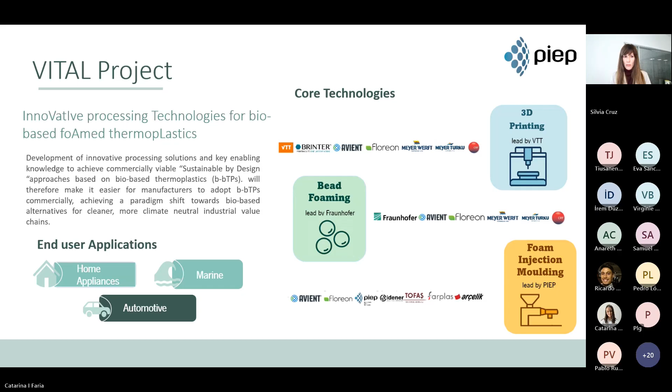To start our program, Johanna Lahti will set the foundations by exploring the world of bio-based thermoplastics. Dr. Lahti holds a Master of Science and a Doctor of Science in Technology in Paper Converting and Packaging Technology. She has worked for over 20 years as a scientist and lecturer at Tampere University of Technology in Finland. Currently, she is a senior scientist at VTT Technical Research Center of Finland, where she has been for more than 3 years focusing on sustainable materials and products. Her research interests include the processing of thermoplastic polymers, extrusion, coating, film casting, and the development of packaging materials. Dr. Lahti has participated in numerous national and international research projects and has authored over 60 scientific publications.

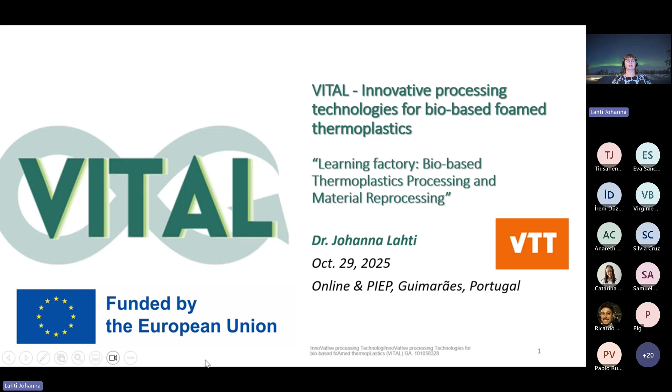First, I have some slides about the Vital project. Silvia already introduced the main areas of our project and some words about our targets, but these are the details of our Vital project. We have been ongoing now almost 41 months, so we are finishing the project next month. You can see all the partners also on this slide.

We have partners from Finland, Germany, UK, Italy, Spain, Portugal, Turkey, and so on - a lot of different partners representing the whole value chain which Vital is about: material producers, processing partners, and then especially the end users who are exploiting the developments of the Vital project. VTT has been the coordinator of this project.

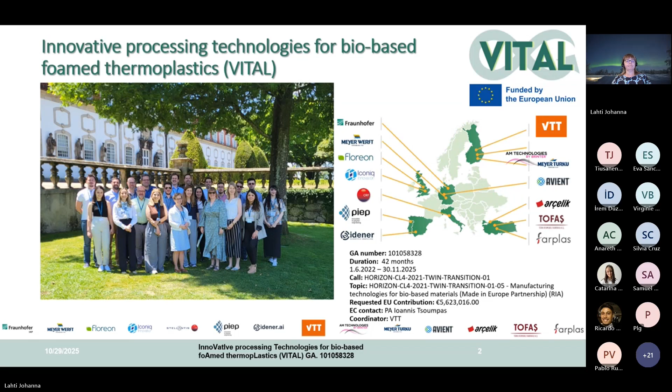The main target of the Vital project is relating to the transition from fossil-based materials to bio-based and recyclable materials. As we all know now, this is not an optional thing anymore - it is a strategic necessity. It is an important thing in the development of new materials and how they are processed and what kind of end products we are developing.

In the Vital project, we are focusing especially on creating solutions that are lightweight, durable, but also recyclable, especially foamed materials, and also adding bio-based materials. So a lot of different targets in the Vital project. Of course, we have different end uses, as Silvia mentioned, three different sectors here, and different sectors have different requirements. So this is a very challenging project to reach all these targets with these new materials and processes.

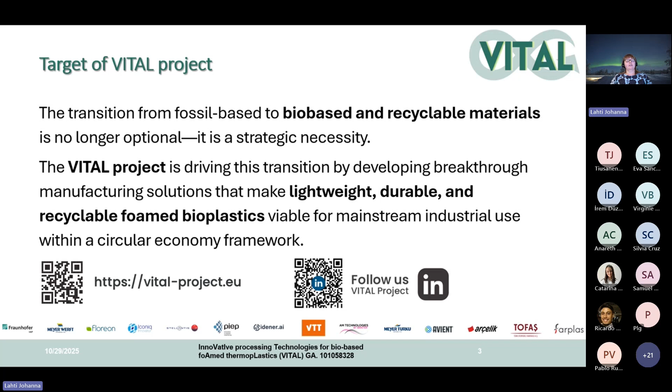In processing, we have three different processes that Silvia already mentioned: foam injection molding, 3D foam printing, and bead foaming. We have different partners responsible for or coordinating these different processes. Recycling of the developed materials is also very important.

Now I am moving from the introduction of Vital to the introduction of this learning factory. I will give a very short introduction to bio-based thermoplastics, and then also different foaming methods that are used.

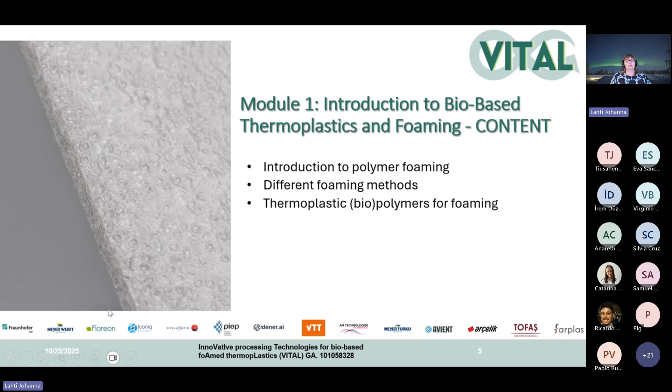So how or why to use thermoplastic foaming in general? Here are collected some positive things we can achieve with foaming. For example, with foaming we can improve impact resistance, increase ductility, and increase fatigue resistance. Materials are very workable and can have very good thermal and acoustic properties. These are properties that we can exploit in many different sectors.

For example, those that we are studying in the Vital project, but also outside that, for example the packaging area. Foaming also reduces material need. We can reduce processing temperatures needed compared to extrusion, coating, or casting - we typically use lower temperatures. We can reduce energy usage. Product weight is very important, so we can create lightweight structures, and we can reduce costs through these different improvements.

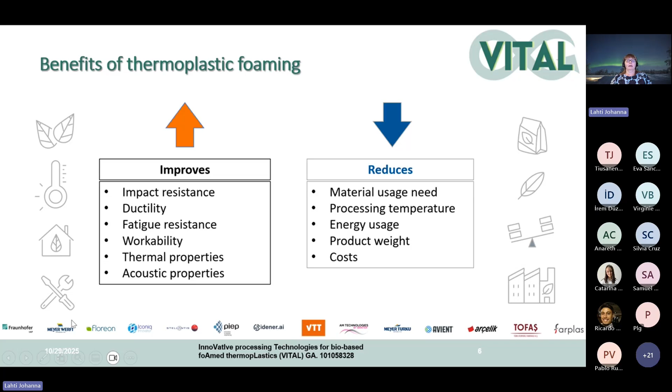About the foams themselves, we can have different types of foams produced through different processes. For example, we can have foams with different densities - from very low densities up to very high densities and everything in between. This we can then use for different end uses, where we need different densities to exploit the properties of these different types of materials.

The cell size can also be different, so we can have so-called nanocellular foams, something in between, and then these conventional cell sizes which are over 300 microns. This is also what makes foaming such a good method or process - we can create really different types of materials and structures.

We can also categorize the foams into closed cell structures and open cell structures, and these also have differences. For example, closed cell structures are typically more dense and stiffer, which is why they are better for thermal insulation. They have good moisture and heat resistance, and good shock absorption properties, so they can be used to pack very fragile objects in transportation.

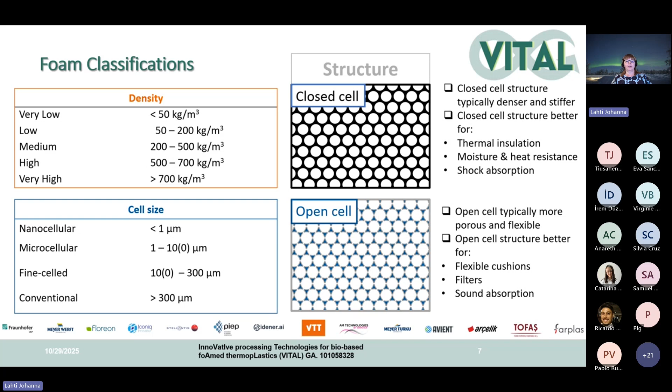About these thermoplastic foaming processes, we can categorize them into three different groups. First, we have extrusion foaming, which is typically used to produce sheet, board, or profile shaped products. This is a special extrusion system, requiring, for example, a melt cooler for low density products. I will show you some examples in the following slides about this process. This is a continuous production process.

Then we have bead or particle foaming, and this is a process where we create 3D shaped objects from fused beads. For the bead manufacturing, we have different kinds of processes available, like suspension polymerization or extrusion. And then also for the bead forming or foaming, we have different processes.

Typically, we use steam in this foaming process. And then the third process is foam injection molding, which is now the topic of this learning factory today, and you will hear and learn more about that today.

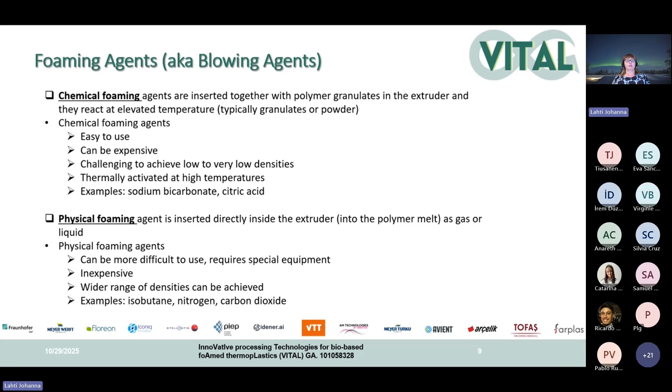Physical foaming agent is typically inserted directly inside the extruder into the polymer melt as a gas or as a liquid. These physical foaming agents can sometimes be a little bit difficult to use. They require special equipment, for example, if we are using gases. But as mentioned, they are cheaper to use than chemical foaming agents, and with these physical agents, we can achieve a wider range of densities compared to chemical foaming. Some examples, once again, are isobutane, nitrogen, or carbon dioxide.

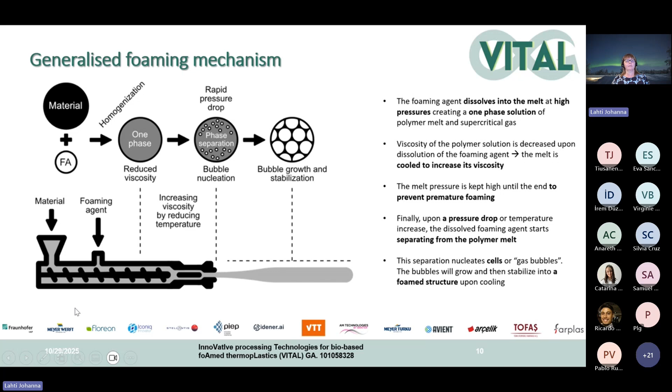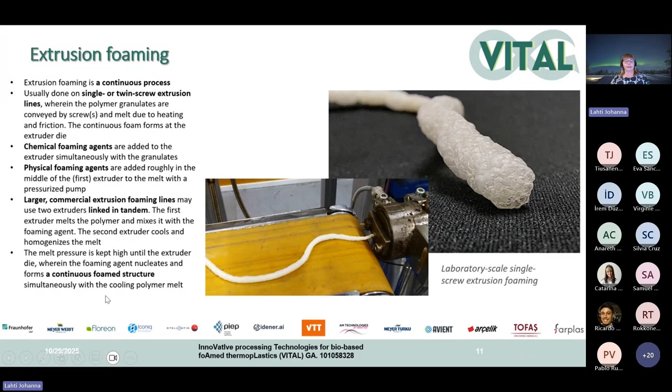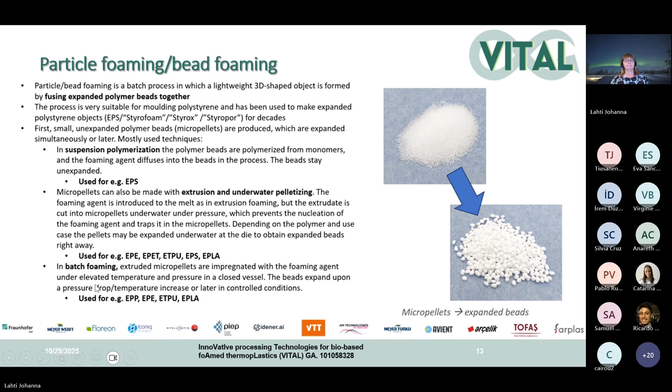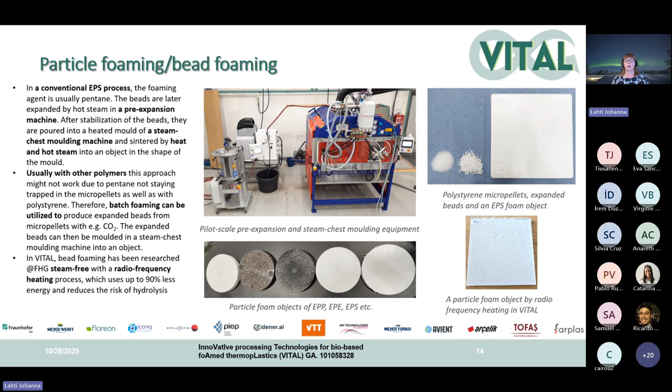Then I have the final slides about the actual polymers. Not sure if I've already gone over time, but I will run these through.

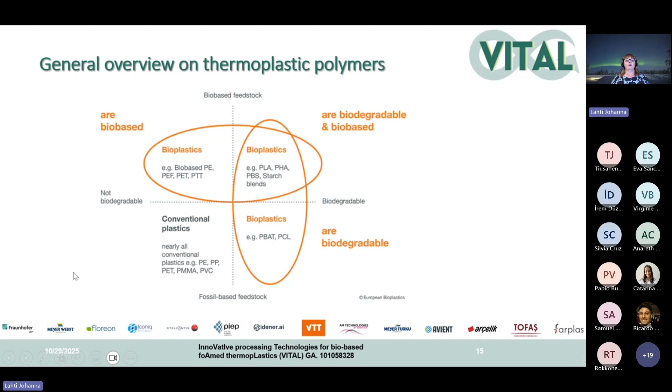This is a picture you may have seen many times representing the different categories for thermoplastic polymers. In the left lower corner, we see the conventional plastics, and then in these other three sectors, we see the different bioplastics. On the left-hand side, we have those that are not biodegradable, and on the right-hand side, we see the categories of biodegradable polymers. The right top corner represents biodegradable and bio-based polymers. You see some examples of polymers from these different categories.

And of course, we can use different biopolymers also in foaming processes, and these have also been studied in the Vital project. When we are shifting from fossil-based materials to bio-based, these bio-based and biodegradable polymers are more and more studied in foaming.

There are some challenges with melt strength sometimes in foaming, and this can be affected, for example, by blending with other polymers or by using chain extenders. In the Vital project, we have studied PLA blend from Floreon in different foaming processes used in this project - 3D foam printing, bead foaming, and foam injection molding. Maybe you will hear more about that later.

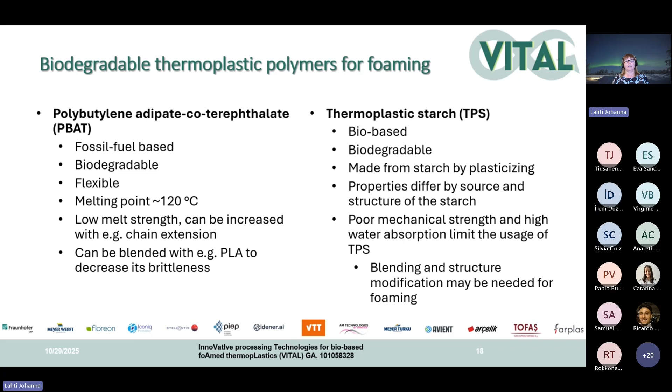Then the last polymer on my list is thermoplastic starch, TPS, which is bio-based and biodegradable. The properties of starch vary quite a lot depending on the source and structure of the starch. Once again, in foaming, mechanical strength can have some challenges, or high water absorption property, so blending or some structure modification is often needed to use it in foaming.

So with this, I thank you for your attention, and I wish you a nice day learning about foam injection molding. Thank you.

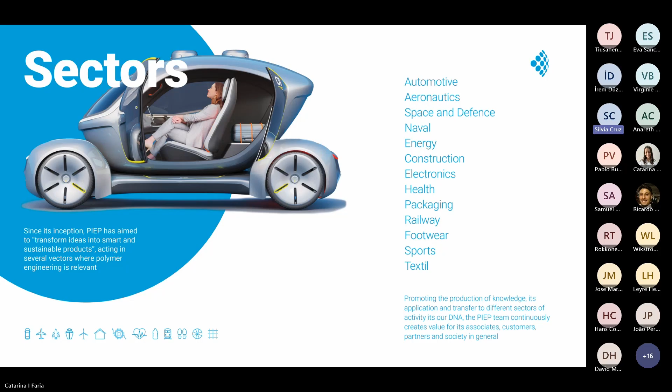We have developed projects in the most varied sectors in partnership with different partners and customers. We work on various issues such as climate transition, development of advanced materials, processing technologies, and sustainable solutions, all to strengthen the competitiveness of the plastics and manufacturing sector.

In this session, I will present the explanation and basic fundamentals of foam injection molding, how it works, and go through the benefits of this technology. Then I will connect it with the Vital project goals, and next cover bio-based key processing parameters and how PIEP is optimizing conditions to ensure consistent foam quality. I'll finish with a look ahead at future perspectives.

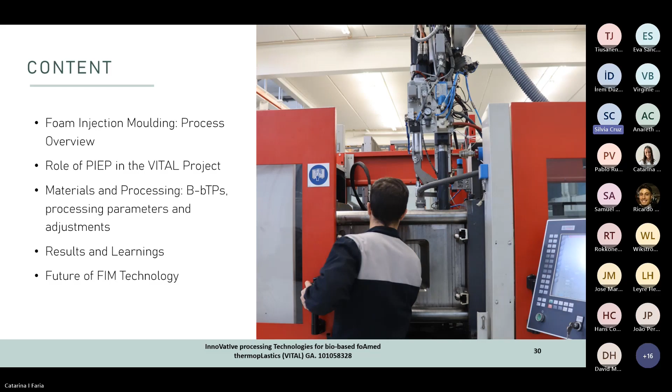So, what's foam injection molding? It's the injection molding process where a gas phase is deliberately introduced into the molten polymer during the process to create microcell structures, foams inside the part.

And how does this work? The foaming agent used in the process could be either physical or chemical. In the case of physical, it could be nitrogen or carbon dioxide. In case of chemical foaming agents, they could be inorganic or organic, such as calcium carbonate or talc.

So the physical foaming agent variation, this is accomplished by injecting the gas in its supercritical fluid phase through a dedicated supercritical fluid injector. In this phase, the gas is in a liquid-like state, obtained by maintaining the foam agent above a critical pressure and temperature, allowing the gas to quickly diffuse into the polymer melt, creating a single phase inside the barrel.

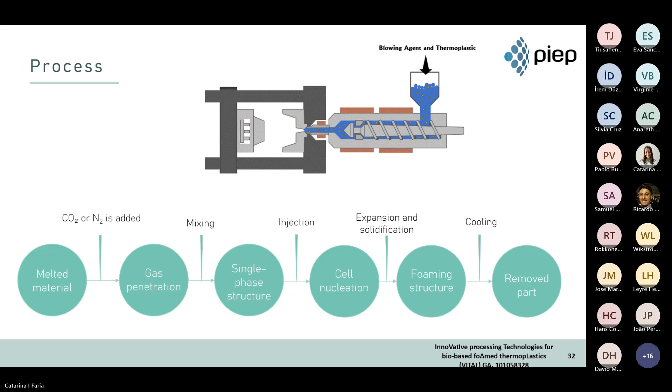In the physical foaming technology, a specific screw is required to ensure proper mixing. The screw is composed of an end region that possesses characteristic geometry to promote dynamic mixing, assuring the creation of a one-phase solution. As such, modifications are made to the end of the screw section or to the nozzle section by attaching a mixer. Due to this, the screw is longer than commonly used in conventional injection molding.

The chemical variant does not require modifications to the injection unit, needing only a shut-off nozzle. The foaming mechanism is promoted by the reaction of the chemical foaming agent in the polymer melt due to the high temperature, as already mentioned.

Some chemical foaming agents are exothermic, which can promote early foaming, reducing the residence time for the material, and consequently the cell structure is not uniform in most cases.

Also, the chemical foaming agent reaction may result in byproducts such as water, which can lead to additional degradation of the polymer matrix and reduction of mechanical properties. Also, the subproduct can damage the mold cavity, and the mold cavity and screw can suffer from this reaction and be damaged prematurely, which can influence their durability.

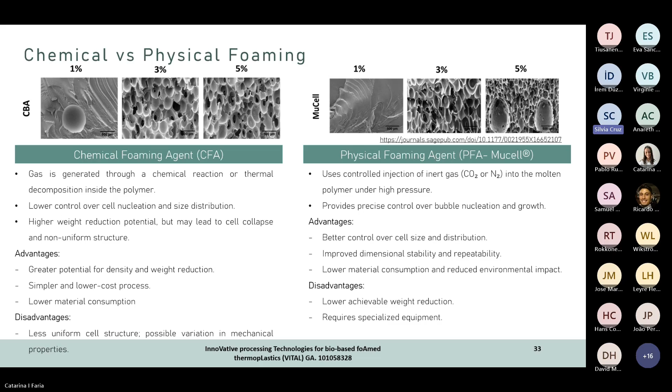So why use foam injection molding? The advantages of this technology compared to conventional injection molding are, to start, cycle time reduction. It could be reduced between 15 to 40%. Why? Because packing and holding phase is replaced by the nucleation phase, and cooling is also faster due to lower melt density and lower thermal conductivity.

Another advantage is lightweighting, reducing part weight typically between 10 to 30% due to the cellular structure. This will lead to lower material use, reduction in costs, and material saving. Also, this technology allows reduction of sink marks and warpage due to the gas expansion that compensates for shrinkage and improves dimensional stability.

Energy efficiency: lower material use and shorter cycles will reduce energy consumption. This also allows for more design flexibility, promoting the ability to mold thicker sections without defects. And lastly, it can also be used for thermal and acoustic insulation parts due to the foam structure.

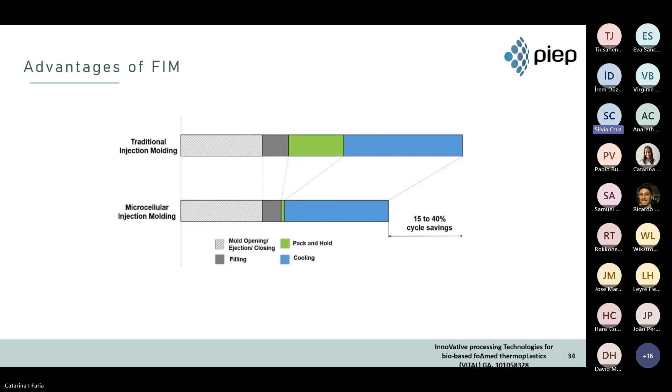Within the VITAL project, PIEP played an important role in the development of the foam injection mold line, one of the three key technology routes being explored. Our team has been working on process optimization, material characterization, and the integration of recycled and bio-based material into the foam injection mold process.

Through experimental trials, digital modeling, and collaboration with partners such as Edener, Arcelik, Tofas, and Farplas, PIEP contributed to the adaptation of the foam injection molding technology, processing bio-based formulations, process optimization, and demonstrating the feasibility of using bio-based materials at pilot scale. It validated material-process interactions under industrial conditions, evaluated mechanical and visual performance of the foam bio-based parts, and defined the key parameters enabling industrial implementation of foam injection molding.

We also helped industrial partners select the most promising formulations between several PLA formulations that were developed during the project by our partner Floreon, through physical, mechanical, thermal, and optical testing for material requirements validation. After the selection of the most suitable formulation of PLA...

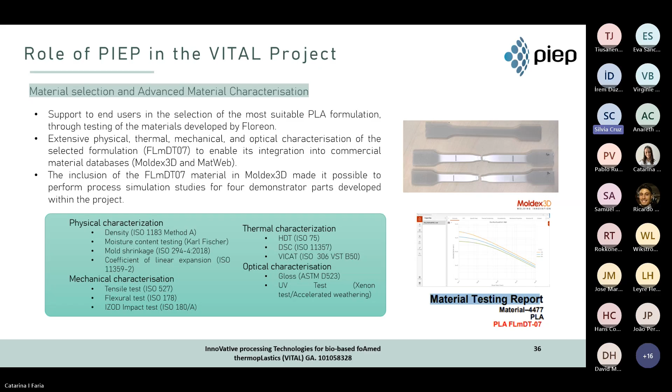We analyzed several parameters such as cell distribution, temperature profiles, material behavior during filling, and also the solubility of the gas in the polymer matrix. In the experimental results, we observed some variability in density between samples and small temperature variations requiring some adjustments. In the simulation, we obtained a more uniform and controlled density, more defined thermal gradients, and a good estimate of the material behavior during filling.

In short, the simulation accurately represented the real behavior of the process, although some small differences were obtained, highlighting the need for continuously validating the model with real data and the fact that there is some variability in bio-based materials. So after these results, this gave us the confidence to conduct some numerical modeling support.

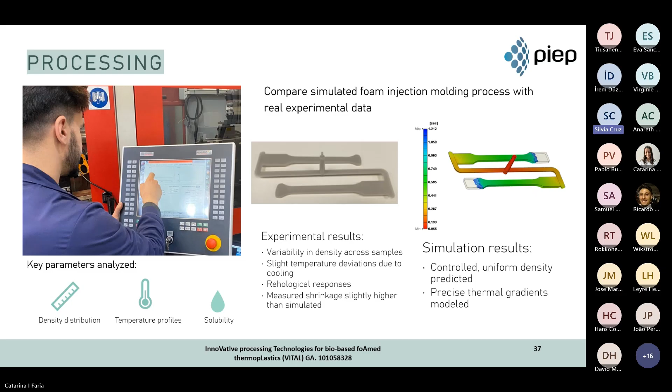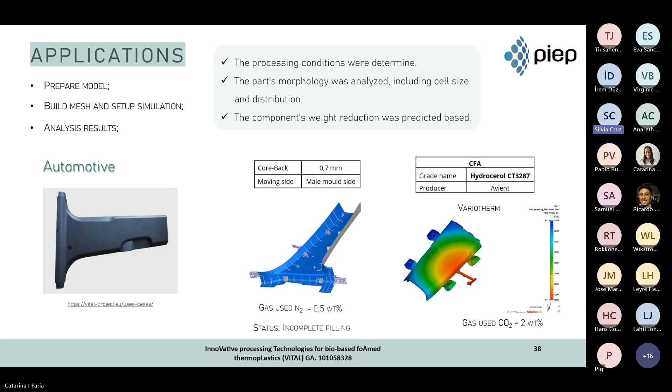Here we can see on the slide that we worked on building the 3D numerical model in Moldex3D for the 2 case studies in the automotive sector with TOFAS and Farplas. In this case, we supported the industrial partners in developing the mold design. In the first image, we considered the Core-Back, and in the second demo case, we also considered Variotherm. This work was also conducted for the home appliance demo case with Arcelik.

By using a transparent mold and a high-speed camera, it was possible to understand how different types and concentrations of foaming agents influence the resulting cell morphology. This information was essential for adjusting bio-based formulations and optimizing injection conditions, minimizing defects such as cell coalescence and collapse. When working with...

bio-based polymers, we often face narrow processing windows and thermal limitations. So mold sensorization and in situ monitorization make it possible to better understand how the material behaves during expansion, helping us define strategies to stabilize the cell structure and ensure adequate mechanical properties.

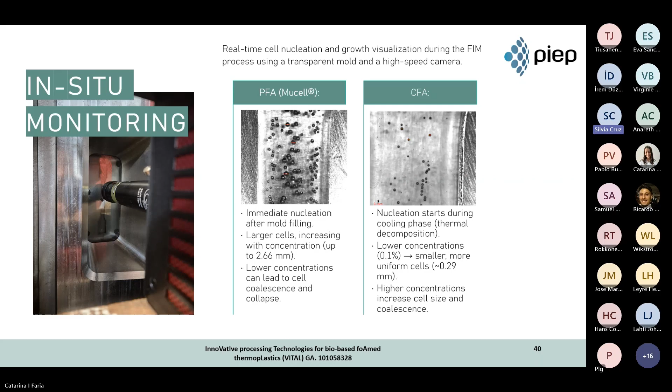During the project, when bio-based thermoplastics were processed using foam injection molding, several specific challenges arise due to material properties that affect part quality and consistency. To start, we have narrow processing windows that present lower thermal stability, tight margins between melting and degradation, and greater shear sensitivity of viscosity.

This results in a higher risk of degradation, discoloration, or gas cell collapse if conditions are not precisely controlled. Also, there's moisture sensitivity and hydrolysis risk - bio-based materials absorb moisture more easily. During processing, water triggers hydrolysis, reducing molecular weight, so foams show cell coalescence, weak cell walls, and loss of mechanical strength. Drying and strict moisture control are essential.

Foam structure depends on gas solubility in the polymer. Some bio-based materials have low solubility, which could lead to poor cell nucleation or large cell size, so it was required to use nucleation agents, gas dose optimization, and precise injection profile control.

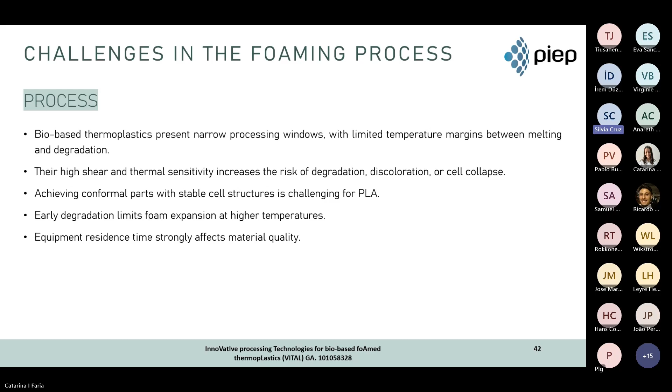Regarding the process, I've more or less talked about this on the previous slide, so regarding equipment and process optimization: injection speed and pressure may exceed limits for some bio-based polymers. Mold temperature and cool time must be carefully adjusted to control crystallization and mechanical properties. Residence time and melt volume must be carefully controlled to avoid degradation, particularly for thermosensitive materials.

Gas-polymer compatibility is limited for several bio-based polymers. Variation in gas dosing for injection profiles can cause instability in cell nucleation and foam growth. Machine size, screw design, and gas delivery system also influence foam uniformity and cell morphology, requiring careful calibration of equipment, optimizing process parameters, and inline monitoring to ensure stable, reproducible foams.

Regarding mechanical performance under foaming, even with solid skins, the foams reduce the load-bearing cross-section. There's risk of brittleness in PLA, resulting in lower impact and fatigue resistance, so material modification or hybrid design is often required.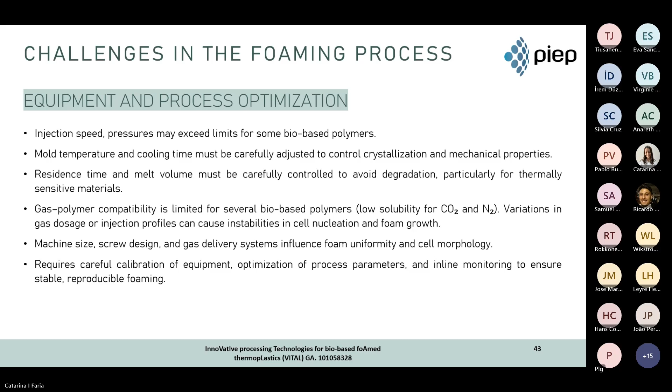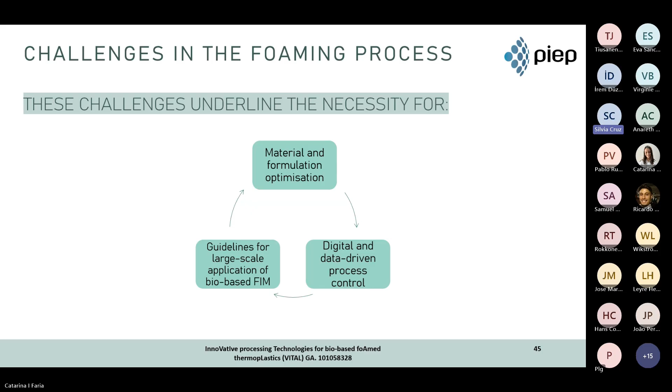In the overall project, this challenge underlined the necessity for several things. The success of foam injection molding depends on integrating material and formulation optimization, process optimization, tooling, machine optimization, and digital and data-driven process control. Overcoming this challenge will ensure lightweight, functional, and consistently high-quality parts.

This challenge illustrates why vital focus was on material optimization, process optimization, digital process control, the evaluation of recycled and bio-based content, and application-driven design rules to unlock industrial adoption of circularity of bio-based foam parts. So this is my last slide.

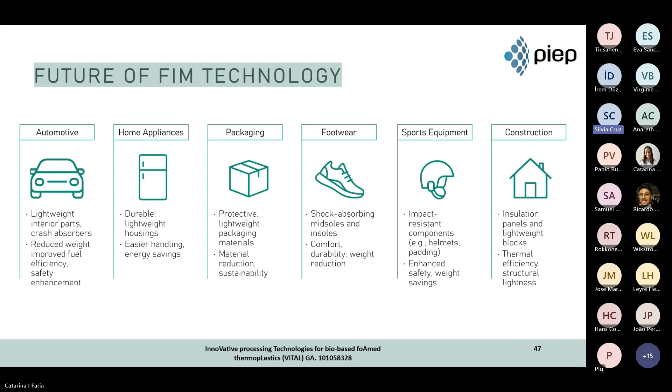The next will address one of today's most pressing challenges: recyclability.

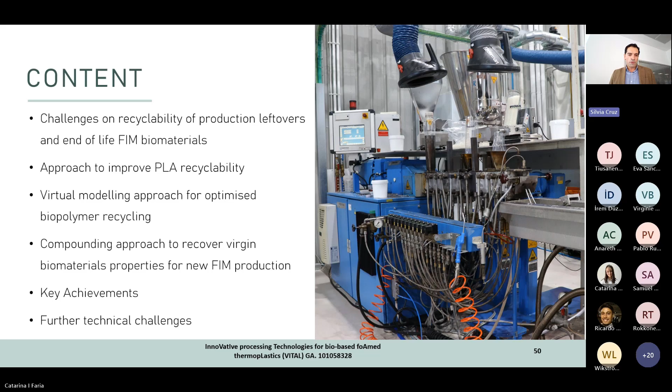We will start with the challenges of recyclability, the approach to improve PLA recyclability especially here in Vital, then the virtual modeling approach that we take, the compounding approach, and in the end, the key achievements and the further technical challenges.

We know that PLA is one of the most widely used bio-based materials nowadays, but we know from previous studies that it shows rapid deterioration when mechanically reprocessed, and end of life recycling remains quite limited because it's, I would say, a brand new material. Usually it's used in single-use applications - here we mainly focus on long-term applications. So it's another challenge that we have.

I would say the main barriers, at least during these Vital developments, were the potential side effects that we get from the foaming process. We know some strategies to work on the recyclability of PLA, but none of them were with foaming processes. So it was an additional challenge that we get.

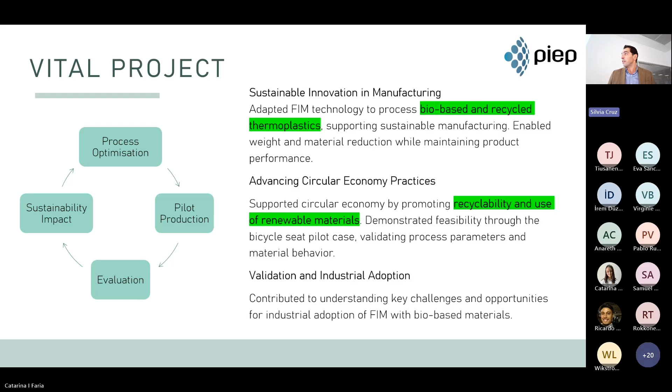And it needs to be addressed. So what was, I would say, the approach, at least on Vital - we mainly focus on digital simulation.

We use software, common commercial software for compounding, that is Ludovic. Together with it, we run some experimental validations on twin screw extruders, mostly used for compounding. So we create some loops between the digital simulation and experimental validation. And in the end, we also try to identify the best approach to improve the recyclability of PLA through compounding and through additivation. So mainly these three were the main steps during the project.

Schematically, how do we run that? We get final parts from the trials, from developments and from industrial trials - bio-based foamed thermoplastic parts. We pass them through a grinder and get the flakes. Then we immediately run the flakes through a twin screw extruder to make the first cycle of degradation, of reprocessing. After that, we get the granules, and then we reprocess again 100% in the extruder.

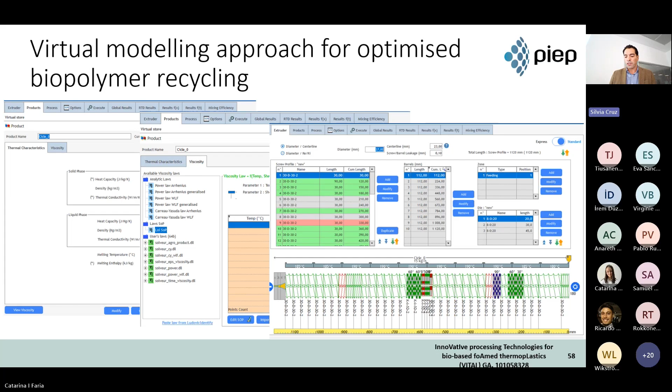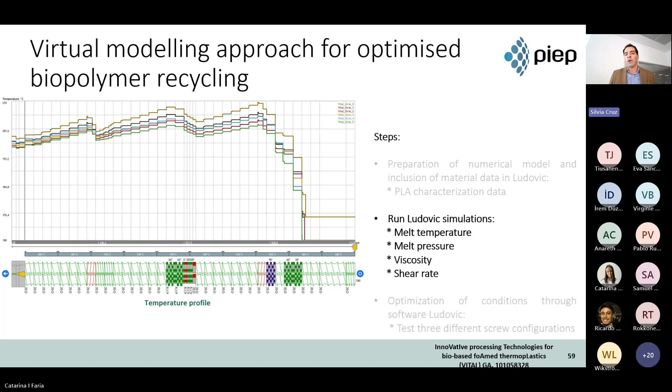So it's a clear indication that the chains of the material are being broken. So there is some degradation, and the viscosity is getting lower. That's why we get melt temperatures lower.

If we go further, we also easily check that the pressures are changing with the reprocessing of the material, and then of course the viscosities are also changing when we simulate the different cycled materials, reprocessed materials. We also can get the shear rates, quite important because we anticipate that there is some thermal degradation of the materials. So it's quite important to monitor the shear rate that we are imposing on this material.

So after, I would say, the first 30 or 35 runs of Ludovic, we also characterize these materials after the reprocessing and try to match the simulation with the reality.

I would say it was not so expected, or at least so extreme as we get on the results. So this led immediately to an approach of changing the screw configuration.

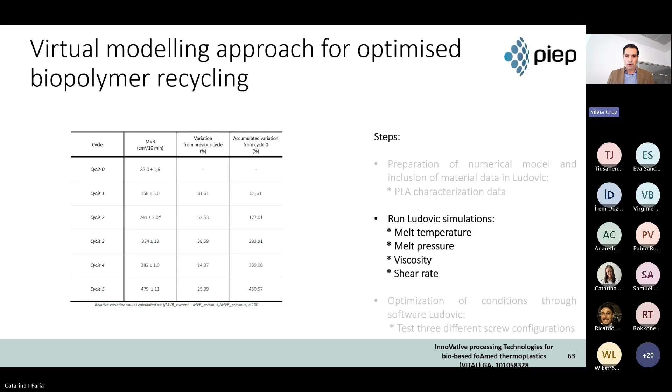So the next step was working on the screw configuration, keeping the processing parameters optimized, and then run the screw configuration. We start with the configuration on the top, and I would say it is a standard configuration for fossil-based materials. We wanted to start with this configuration and then try to identify what was the best approach.

So with the results, the approach was to, I would say, soften or lighten the aggressivity of the mixing elements on the screw. So we focus on those elements in the middle of the screw, and the two variations of the screw configuration were lighter than the first one.

With this optimization of the screws, again, we run the simulations, and what we get immediately was a decrease on the temperature profiles of the material, a clear indication that, of course, the shear rates of the material were lower, and we get at least expected less degradation of the material.

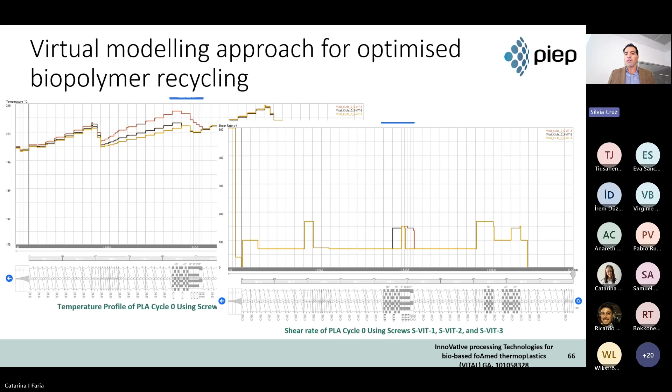We also noticed a strange, I would say, result of the simulation regarding shear rate. Of course we changed the length of the mixing zone, but there were some unexpected results on these differences in the shear rate that we get from the software.

With this, we then run again some real experiments on the compounding with these elements and with these screws, and actually we get a real change on the degradation, I would say, of the material.

So in the table we compare the most aggressive and the less aggressive configurations between cycles 0, 1, and 3, and what we get is a major difference in the MVR results. So actually, this change in the screw configuration, I would say it's more relevant, at least from the results that we get during the project.

It's more relevant than the optimization of the parameters on the compounder, and it was quite interesting, this result.

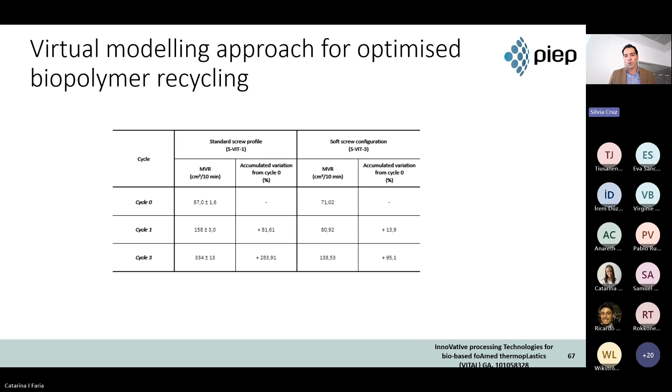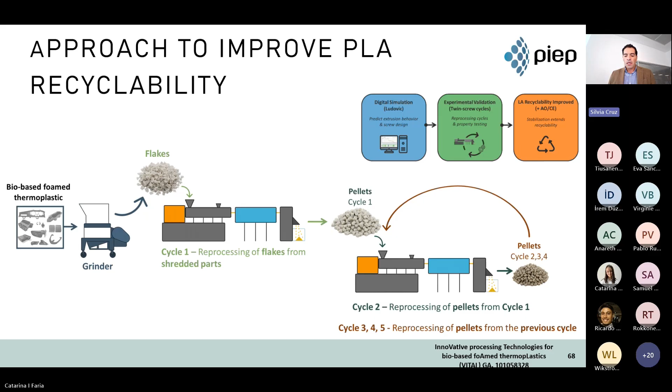So the final step was, okay, we know that the material suffers some degradation on the recycle. We know that with increasing cycles, the material gets more and more degraded, but we wanted to study and try to identify what was possible to do to avoid this level of degradation. So we decided to test some additives. Joanna mentioned chain extenders, usually used to avoid the break of the molecular chains of the polymers. So we have some chain extenders, and we also have some antioxidant additives. The idea was to try to avoid the degradation observed during the reprocessing.

So again, we ran - I will not bother you with more Ludovic graphics, but we ran again some simulations. We went to the extruder to validate that, and in the end, I would say that we expected a bit more improvement. It was not what we got.

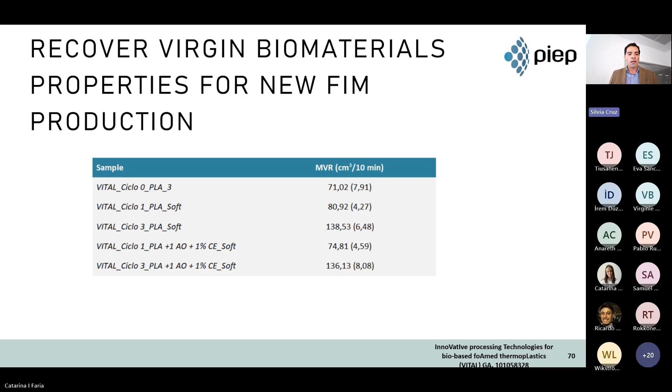So what we got was only a slight improvement on the lower degradation of the material. At least when we measured the MVR, we saw that with the reprocessing cycles, the material is getting less viscous and more fluid, and there is still some degradation. What we also performed was to double check the mechanical properties of these materials with this approach, and what we get is a slight improvement when we compare the non-additivated with the additivated materials.

So what we have seen, and just to remind you, we made 100% recycle of the material. We were not diluting the material with virgin polymer. We were speeding up the degradation, and since we were speeding up the degradation, we got degradation results in the end.

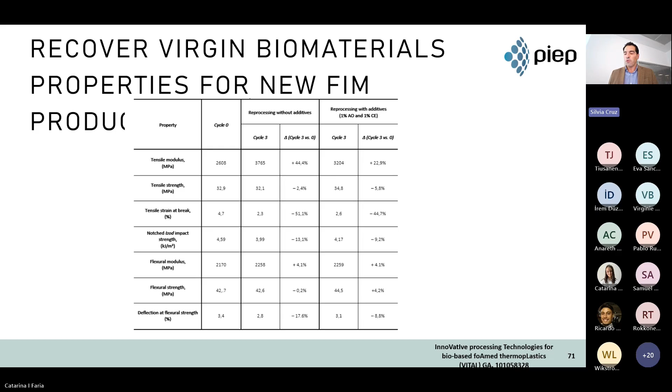So the results were quite interesting, I would say. It was a massive experimental and simulation study, but in the end, I think we can say that we were able to at least establish a comprehensive database of PLA behavior across these multiple recycle cycles.

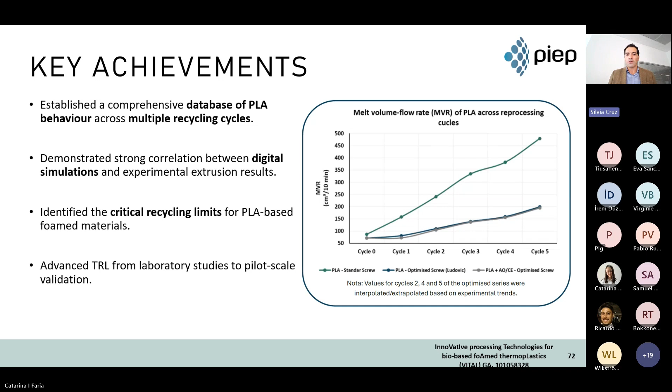It was quite interesting because we know Ludovic was previously developed for fossil-based materials. We are using it for bio-based materials, but we get good correlations on that. And then, of course, we could identify some critical recycle limits on the PLA, which was also quite important for the project. I think we could advance the TRL from a lab-scale prototype development to a pre-prototype scale, working with twin screw extruders similar to the industrial ones. So I think it was a nice step that we achieved during the project.

So regarding further technical challenges, I would say that Vital was quite good at identifying these PLA recycle challenges. What we got during these developments was a clear batch-to-batch variation when we get the material from the suppliers. That's an issue. When we work with fossil-based materials, we are used to getting the same material consistently. When we change to bio-based, we need to take that into account because there are some slight variations between batch to batch. Of course, we have clear degradation trends on the reprocessing and massive variation in the properties of the material.

Of course, we identify some limitations after these multiple cycles. For sure, if we add a lower percentage of recycled material to virgin material, we get better results, but at least we know that these variations are massive. We also observed, comparing the non-foamed with the foamed material, that the sensitivity of these PLA pre-foamed materials is higher than the non-foamed.

Well, thank you so much for the introduction. My name is Pablo Ruiz, and I'm here to present a digitalization training session, although I'm going to also cover the part of injection molding. I think there is a lot of interest also in studying digitalization in other manufacturing processes. This session is part of a synergy between the Cubic project and the VITAL project. In fact, I'm involved in the digitalization parts of both projects. So I'm going to present the contents of this training session.

I want to present first a small project overview of both the Cubic and Vital projects, not very technical about all the parts that the projects have, but more focused on the digitalization parts of each one. I will also cover the current landscape of digitalization in manufacturing sectors, not only in foam injection molding, but in general in different industries. Then I'll discuss potential emerging technologies and a case of success.

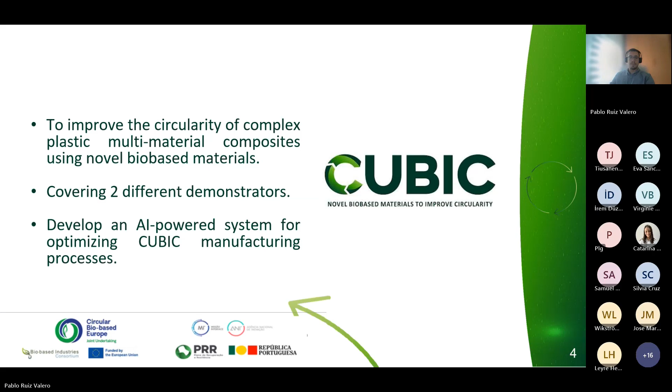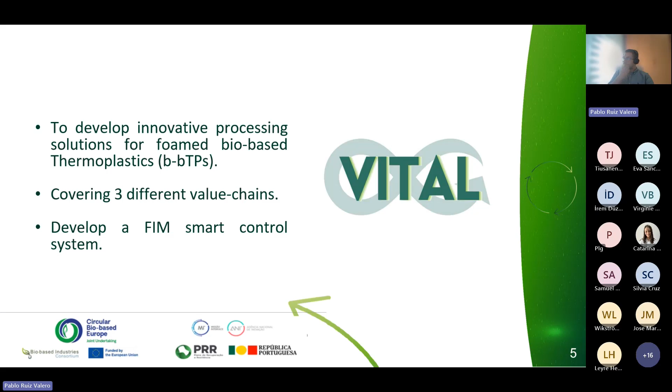Then, during the VITAL project, as has been presented previously in this training session, the main aim is to develop innovative processing solutions for bio-based thermoplastics, also covering the three different value chains previously presented. The digitalization part covers the development of a foam injection molding smart control system for optimizing this process.

I want to talk a little bit about the current landscape, not only related to injection molding, but in general, because in my experience with different processes where digitalization has been involved, the main barrier, the main issue I have realized, is the data. Data is closely related to the lack of sensors, lack of data gathering infrastructure, and so on. Here is some data, for example from reports by McKinsey, showing that only 30% of manufacturing companies, including the technical teams in charge of these manufacturing plants, have realized the potential of Industry 4.0. This means that the vast majority of manufacturing companies haven't studied how these technologies can impact their processes, and it's quite related to cost.

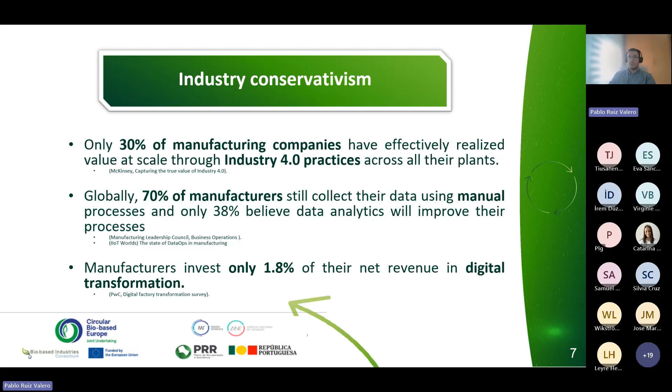Then, 70% of manufacturers that gather data use manual processes to collect them, and only 38% believe that these analytics will improve their processes. This is the main issue, because having data is the basis to step onto digitalization of the processes. So this is a real concern you have to study within your own processes, to see if it can help. And the investment is only 1.8% of net revenue for digital transformation, having, as we are going to see in the next slide, huge potential for different aspects.

But the real thing here is what emerging technologies and what different strategies can be used in order to improve and digitalize manufacturing processes. Here we have the three that I consider most important: artificial intelligence, IoT and big data, Internet of Things, and robotic systems.

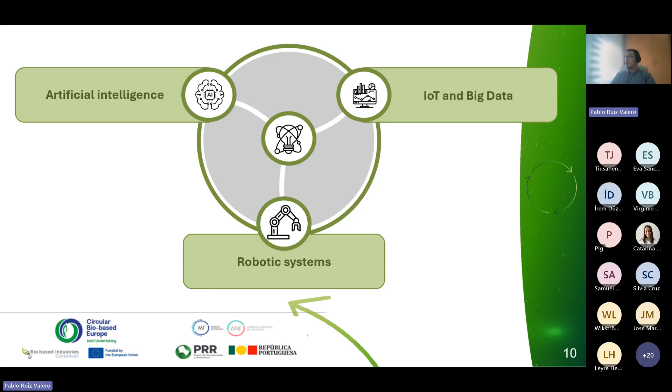Although, for example, for artificial intelligence, we are bored of hearing about ChatGPT and other large language models, there are plenty of models and approaches that could be considered more traditional, that have a real impact in the manufacturing sectors. Also, the Internet of Things and big data will provide big support for data gathering and collection, while robotic systems could improve different aspects, such as automation of manufacturing processes, movement of materials, and so on.

Specifically regarding artificial intelligence, I would like to highlight three aspects that could be really relevant within the digitalization of the plants. The first one is automated quality control, which could be specifically related to computer vision models. For example, when you are producing a specific part with injection molding or foam injection molding, having computer vision models that support you in identifying if the dimensions and properties of the part are correct could save lots of time from personnel that would otherwise do this process manually.

Also, adaptive control based on optimization strategies is very relevant, because this is basically what has been done in the VITAL project, optimizing the processing parameters in order to adapt the manufacturing process to the materials being used, and then to forecast supply and demand. For this, different predictive models can be used in order to train a model that is able to identify what the demand will be for a specific product.

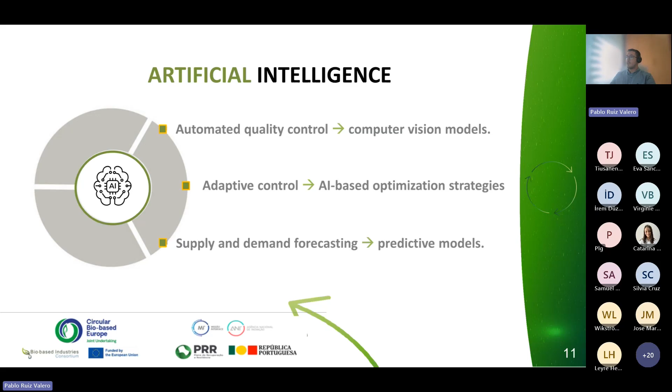And the basis of each one of these technologies is the data, because for training these different models and for refining criteria and guidelines, you have the data in order to provide a good baseline for training.

Regarding IoT and big data, process analysis covering statistical analysis and indicators is very important. For example, in the foam injection molding process, analyzing the average injection time, or the material consumption in each injection, or other kinds of bottlenecks, is very relevant in order to evaluate how you can reduce material consumption, for example.

Then another point really relevant is smart inventory tracking using, for example, RFID tags and readers. When you are in the warehouse, you have different materials located in different areas. Using such technologies could support you in identifying the correct elements very quickly and more efficiently.

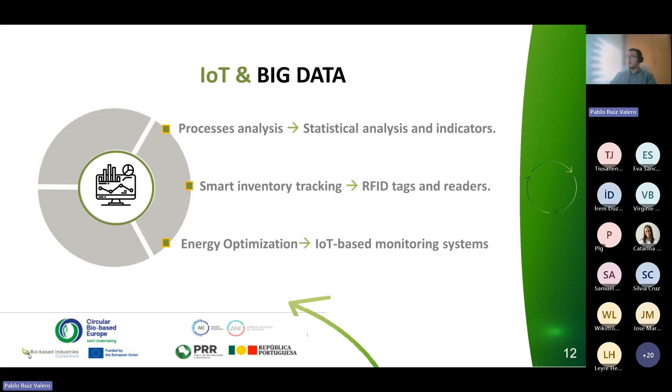And then energy optimization. You can evaluate within your processes the energy consumption, for example, in foam injection molding, the temperatures of the nozzle, and you can see if you can achieve good quality of the products by reducing these temperatures, which is directly related to the energy.

And then regarding robotic systems, we have AGVs, automated guided vehicles, for the transportation of raw materials or manufactured parts from one side to another of the warehouses, fast packaging and sorting with pick and place robots, and reconfigurable cells for flexible and adaptive manufacturing.

In this project, Idener developed two different models. One model was trained for the prediction of part properties, covering density, size, weight, and so on. The other model was trained for the prediction of potential defects, such as shrinkage or warpage. Then those models, once validated, were integrated within a control loop.

We support the operators by integrating an interface that provides decision support. The main functionality of this system was to gather the current processing parameters via MQTT and to process them in the Vital Smart Control System.

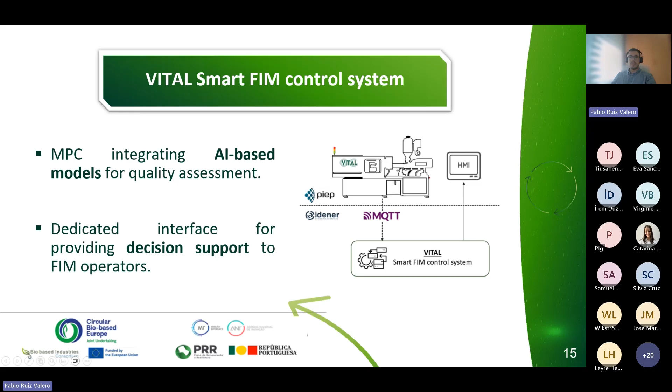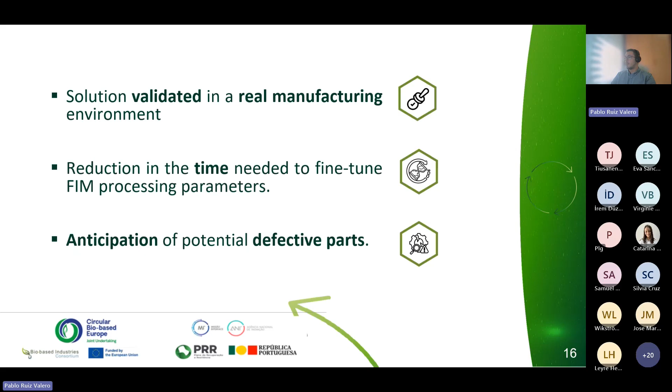What we got was a solution validated in a real environment at PIEP facilities. It reduced the time needed to fine-tune the foam injection molding parameters, because if it was the operator that had to evaluate which parameters were better at each moment, it would take a lot more time than having this automated tool. It also helps anticipate potential defective parts or deviation in part properties, so we save material.

Here I'm including the human machine interface that we developed. On the left we have the processing parameters gathered from the machine automatically and the predicted outputs, and on the right we have the ones that will be provided and optimized by our system.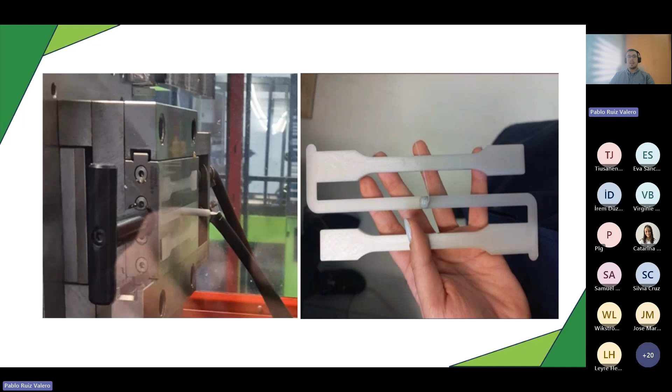Now I would like to mention briefly funding opportunities, because implementing some of these solutions is not direct nor cheap. The Cubic and Vital projects are part of the Horizon Europe funding program, where both manufacturing companies and research centers join forces to develop different solutions and validate them at their facilities. So it would also be a good opportunity for your companies if you are interested in this kind of solution.

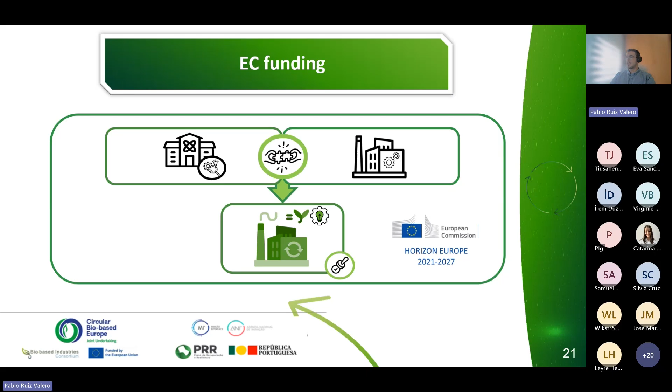So this is all from my side, and thank you so much for your attention.

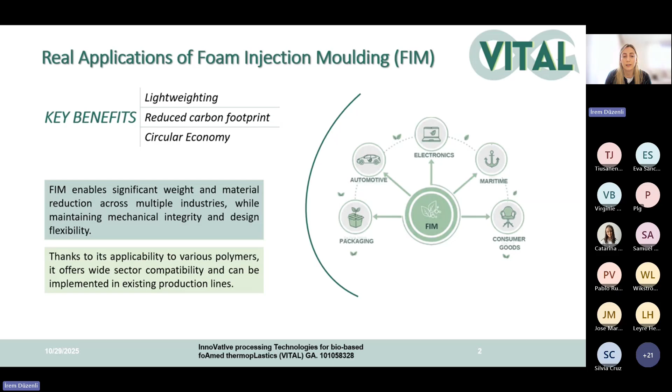This technology enables significant weight and material reduction across multiple industries like packaging, automotive, electronics, maritime, and consumer goods. Thanks to its applicability to various polymers, it offers wide sector compatibility and can be implemented in existing production lines. These are some examples of industries where we can use this technology - in automotive, for example engine undercovers and door panels, and we can use this technology in structural parts and also packaging parts.

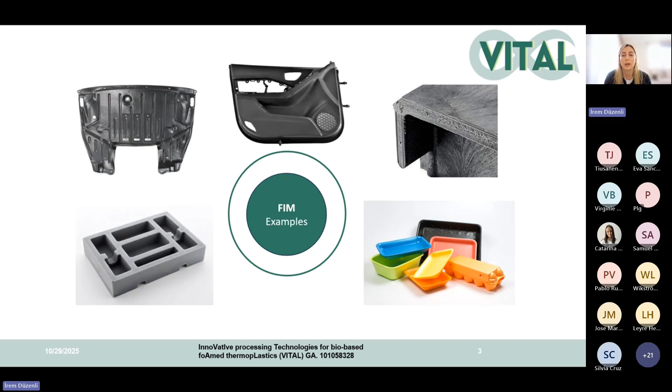As Farplas, we already use this technology for engine undercovers for our customers. In the VITAL project, with foam injection molding, we tried to produce two different demonstrators for two different industries. One is for automotive, where we use foam injection molding with chemical and also physical foaming - our demonstrators are the Doblo B pillar lower part and the Tipo B pillar lower part. With chemical foaming we produce the Doblo B pillar lower with PLA, and with physical foaming we produce the Tipo B pillar lower parts with PLA. Also Arçelik has a demonstrator with injection molding - an evaporation cover and vegetable tray, which they are also trying to do with PLA and foam injection molding.

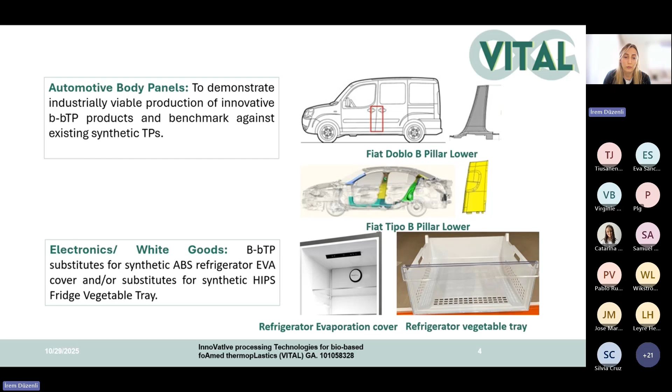In general, chemical foaming is one of the technologies of foam injection. In this method, we use a certain amount of chemical foaming agent in the process, and after mixing this in the machine, we inject it into the mold and then take the part out. I'll separate the discussion into chemical foaming challenges and physical foaming challenges, because in general they have differences in their challenges.

In chemical foaming, we have challenges about product quality and aesthetics because sometimes with chemical foaming agents we get poor surface appearance like silver marks, flow lines and weld lines, because it's very hard to get optimum parts with chemical foaming agents. We also struggle with non-uniform cell morphology and color change, especially in lighter colors like white, where we can see color changes in the parts.

Our other challenges are process control and consistency, especially with PLA material. In this project we saw problems with the process conditions. We really need to optimize the process, especially arranging the optimum temperatures, because PLA degrades at high temperature, and even with chemical foaming agents it degrades at lower temperature too. It starts to degrade and our parts can become very brittle after adding the chemical foaming agent. These are very important points for the process.

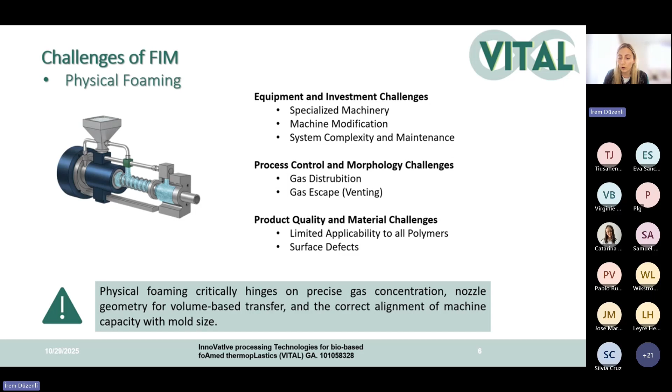Now I want to give some examples about our use cases in the Vital project, real examples. This is our latest results obtained during the project. We can say that we achieved nearly 8% weight reduction, and now we're using 1% chemical foaming agent in our process.

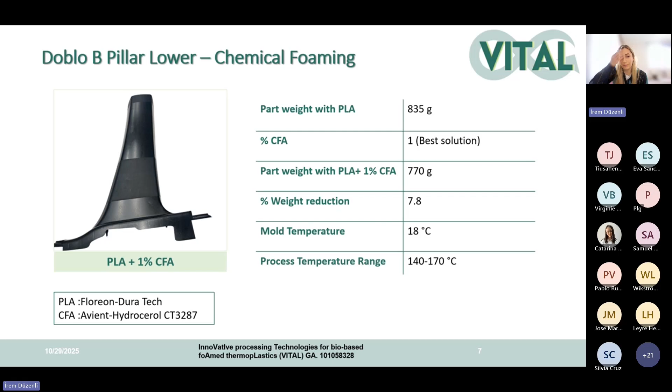Our most important problem was parts sticking to the mold. When we tried to get rid of these issues, we tried a lot of things like decreasing the temperature and decreasing the chemical foaming agent. But in this case, our problem was that the mold was made for PP material, while PLA has lower shrinkage than PP, so our part dimensions came out quite bigger than the original one. This also caused some sticking issues on the mold.

But in our latest trials we solved these problems by arranging the chemical foaming agent and process parameters. Now I can say that we solved these dimension problems through process optimization. Tofaş will now make validation for these parts, and we are still waiting for the validation. After that we can see the other results for these parts.

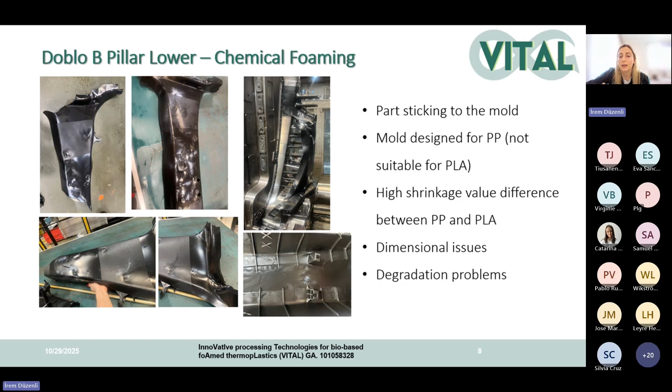I want to give some brief information. I already mentioned that we have degradation problems with PLA because it degrades at higher temperatures, and our injection molding machine has quite big capacity. So when PLA waits in the screw, it degrades. You cannot make it wait after the trials; you need to continuously continue the injection.

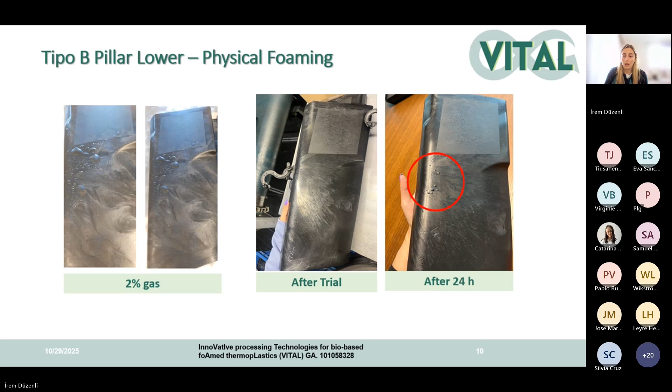Generally we see the same problems with PLA and physical foaming, but it's not about the material - it's all about the gas amount. We already use a lower gas amount for this process, and now we believe it's because the machine is bigger than needed for our mold. This is the end of my presentation, thank you for listening.